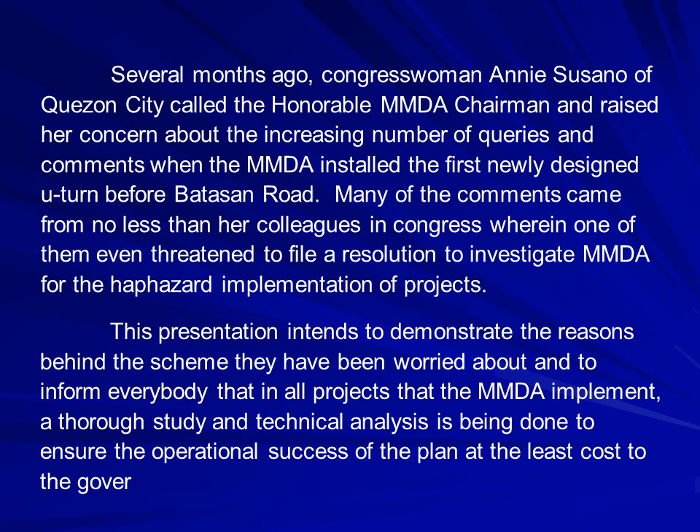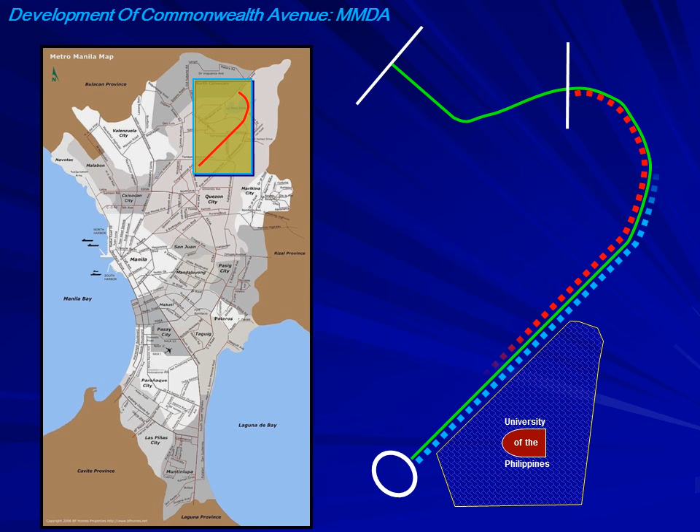Commonwealth Avenue, or Don Mariano Marcos Avenue, is the widest road in Metro Manila and the entire Philippines. Lying in the northeastern part of Metro Manila and Quezon City, it caters to 221,759 vehicles per day to and from the business centers of the city and the southern part of the metropolis.

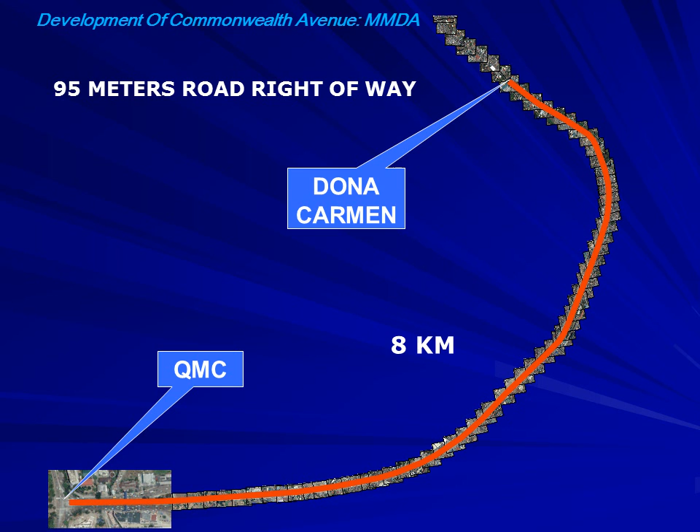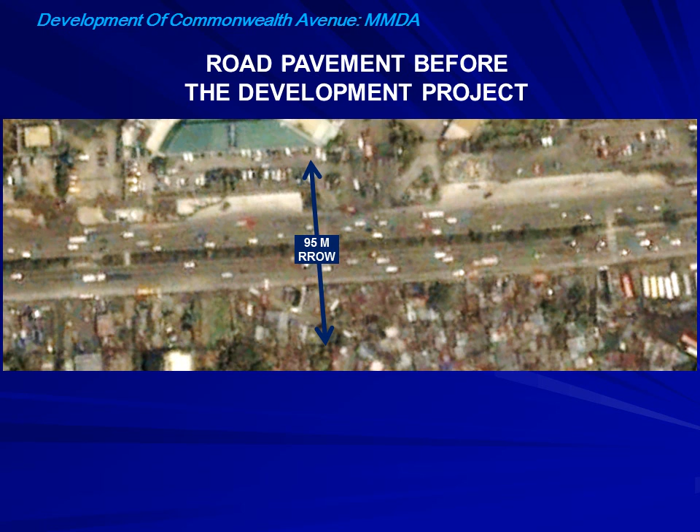It has a 95-meter road right-of-way, or RROW, from Quezon Memorial Circle up to Doña Carmen, a full 8-kilometer stretch representing 67% of its entire length of 12 kilometers ending at Mindanao Avenue. Before the start of the development project, the road has a variable width of 5 to 8 lanes, and most

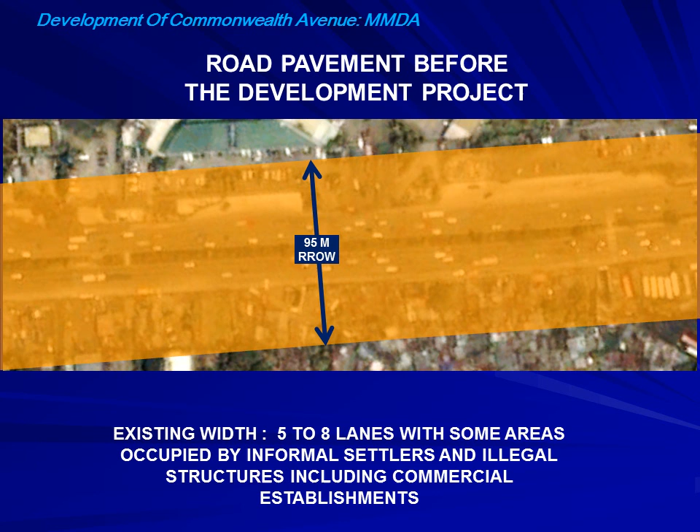of the areas beyond the pavement are occupied by informal settlers and commercial establishments. With that situation at hand, we in MMDA knew that it will take the long-known political will and determination of the Metro Chief and the cooperation of the local government of Quezon City, the understanding of all sectors and the entire community as well, to substantially clear the obstruction and give way to the continued progress of the development plan.

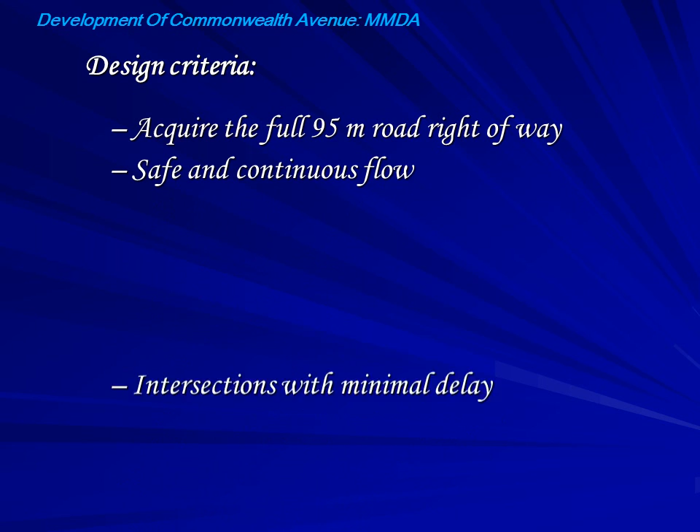To start the project design, we have set the following criteria. First is to acquire the full 95-meter road right-of-way. The road must have a safe and continuous flow, intersections with minimal delay, average speed of 50 km per hour, and design speed of 80 km per hour.

We also must have minimum obstruction and eliminate concrete barriers at U-turn slots. Finally, we should provide space for mass transportation system like LRTs, MRTs, tram, BRT, etc.

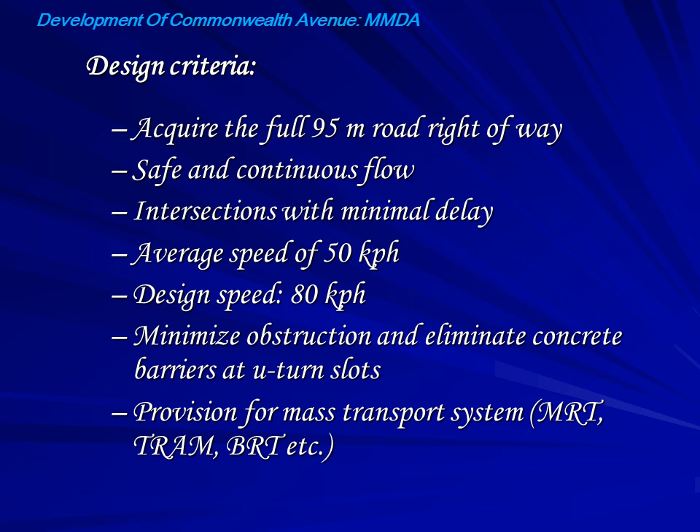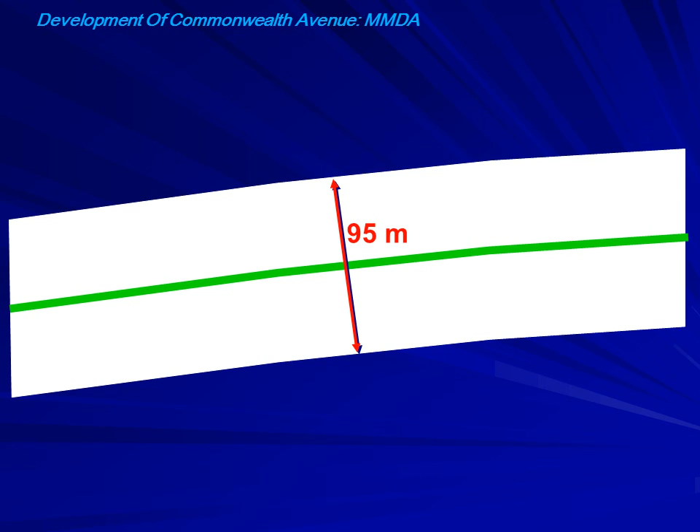Now, what are we going to do with the 95-meter road right-of-way? We can have a 10-lane road each direction with enough sidewalk, bike lane, and planting strip. But traffic engineering view stated that we should not.

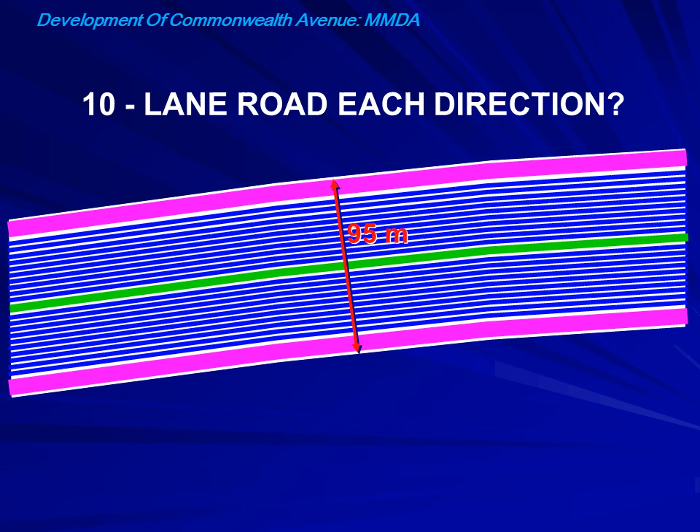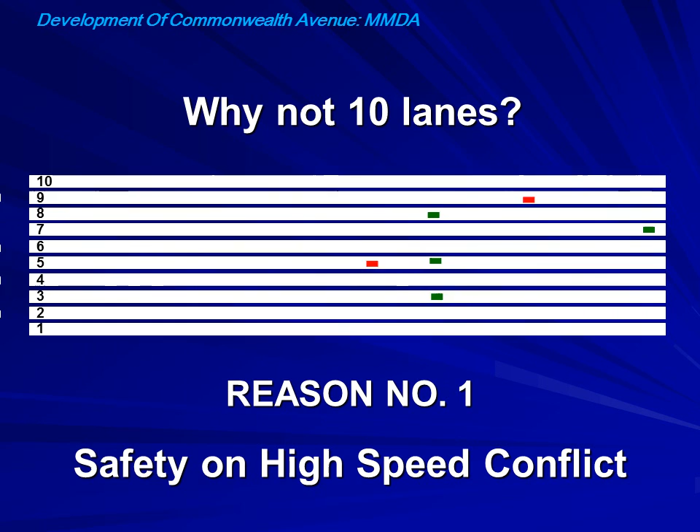Why? First reason is that there would be a safety hazard on high-speed conflict. When you are traveling on a highway at 50 to 80 kilometers per hour, you would be taking a dangerous movement from innermost to outermost lane when exiting to the abutting street or side street establishments. The same way in entering to the innermost lane. This is the same reason why no traffic engineer around the world assigns 10 lanes side by side on a high-speed highway.

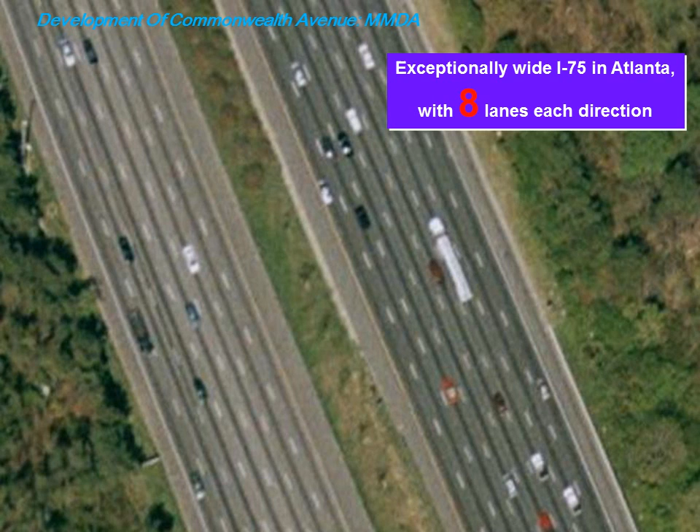Let us take a look at the widest roads in modern countries around the world. Exceptionally wide Interstate 75 in Atlanta, with 8 lanes each direction. Zagreb, Croatia is 70 meters wide, but only has 6 lanes, 3 lanes each direction.

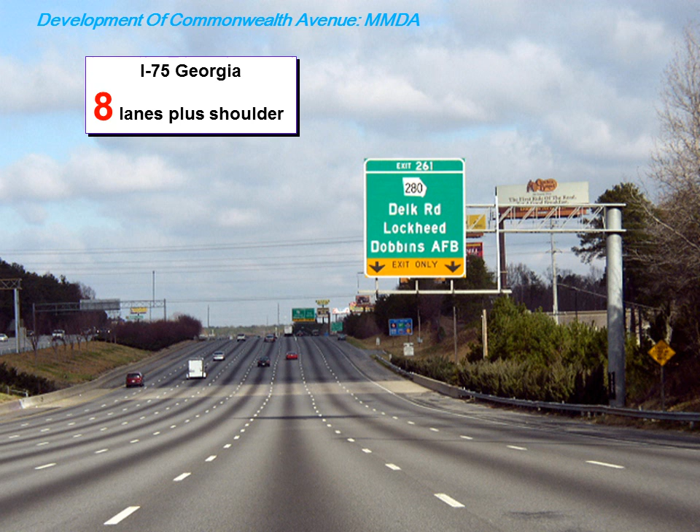I-75 Georgia, 8 lanes plus shoulder. Netherlands, A16, 5 lanes between dividers. A4, the western part of the ring road around Rotterdam, about 95-meter RROW, similar to our Commonwealth Avenue, but only has 2 to 3 lanes between dividers with shoulders.

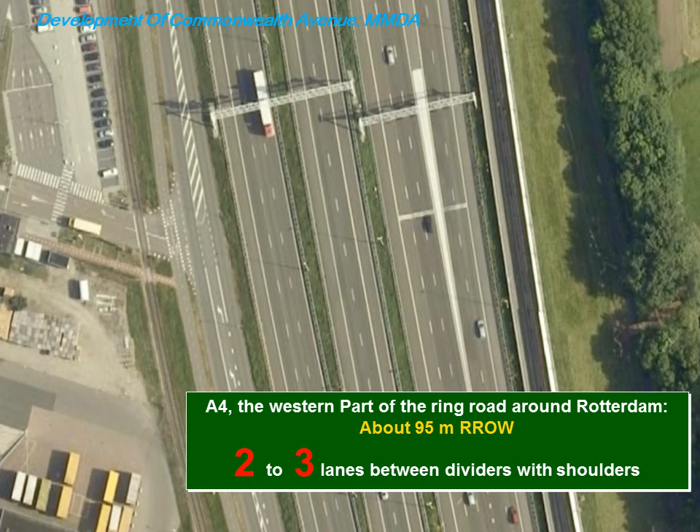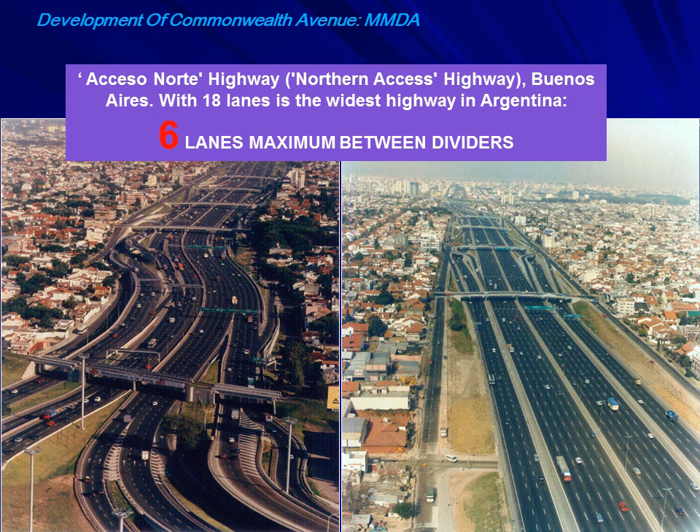Acceso Norte Highway, or Northern Access Highway in Buenos Aires with 18 lanes, is the widest highway in Argentina, 6 lanes maximum between dividers. Netherlands, A15 southern part, 6 lanes maximum between dividers.

Second reason why we should not assign a 10-lane carriageway is the vehicle conflict and traffic management problem on junctions. What we have at our hands is a 20-lane highway crossing against a 4-lane road. Commonwealth Avenue has 4 full intersections and at least 8 T-junctions.

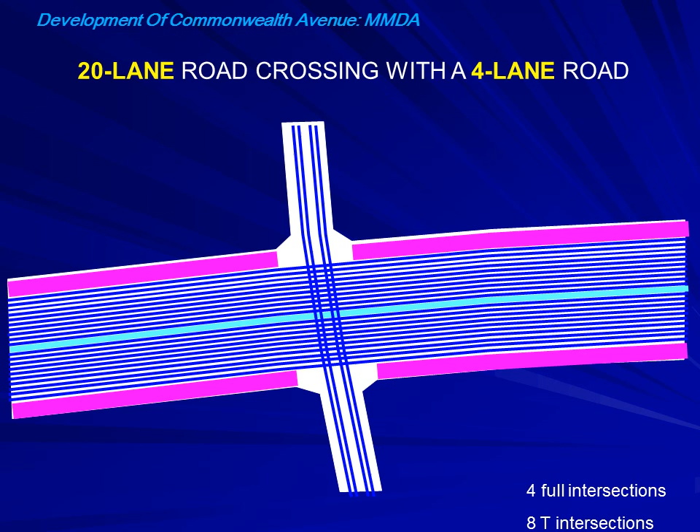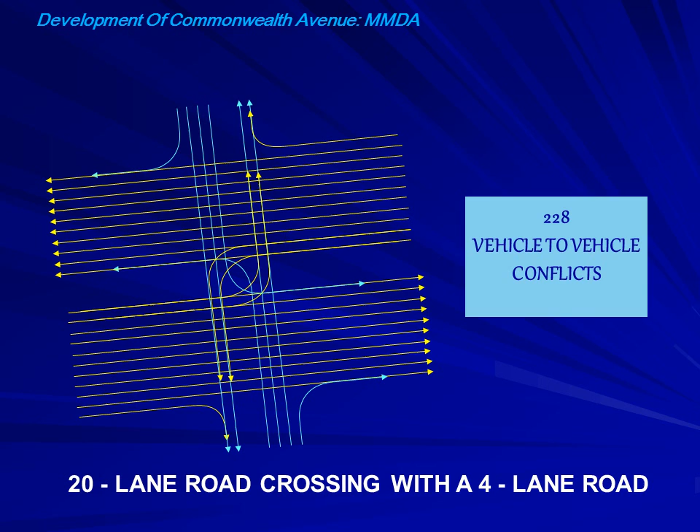This kind of junction will give 228 vehicle-to-vehicle conflicts, a situation that traffic engineers like very much. First, because it would give them a challenging job, and second, it would assure the need for their expertise and continuous job, of course. The foregoing considerations dictate that we have to reduce the number of lanes.

Commonwealth Avenue, with closely 222,000 vehicles per day, 13,000 of which pass the road during morning or afternoon peak hour, would need at least 5 lanes each direction. Considering the future increase in vehicular volume, 7 lanes per direction will be assigned.

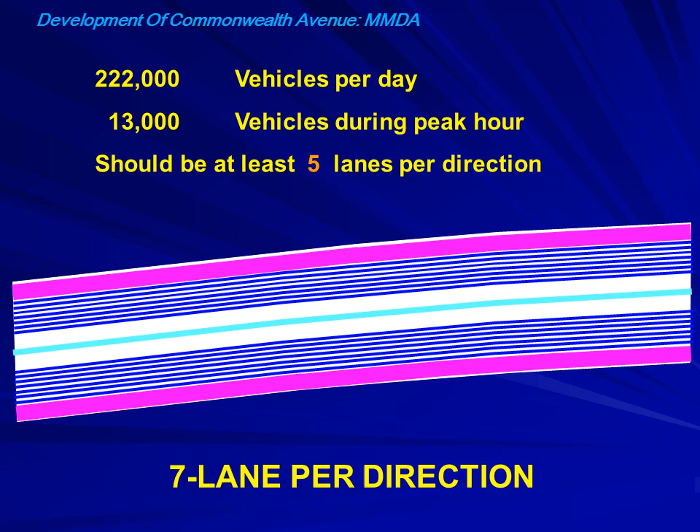What are the traffic engineering solutions to address the conflict? First, we can install traffic signal light facility at 5 million pesos plus 2.5 million maintenance expenses per year.

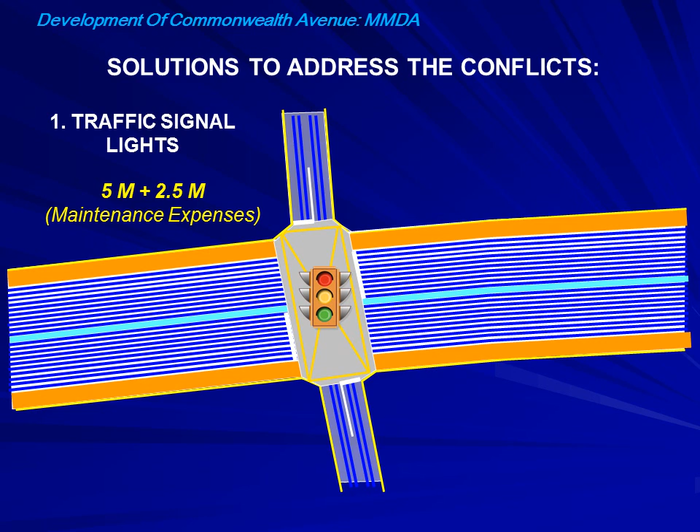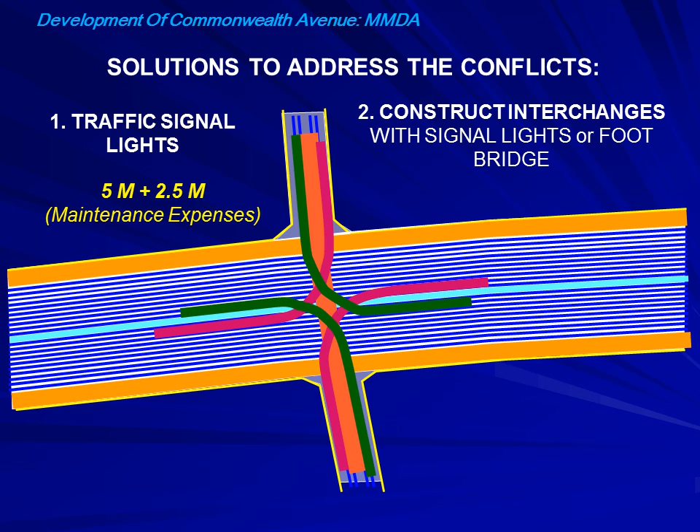Second, we can construct conventional interchange using 5 flyovers up to 4th level with footbridge or signal light for pedestrians. This would cost us about 1 billion up to 3 billion. Or we can construct elevated U-turn interchange for about 400 million.

Another simpler solution is the at-grade U-turn, which would need about 30 meter space at the center for the turning radius of long vehicles. This would cost only about 2 million per set and 24 million for the footbridge.

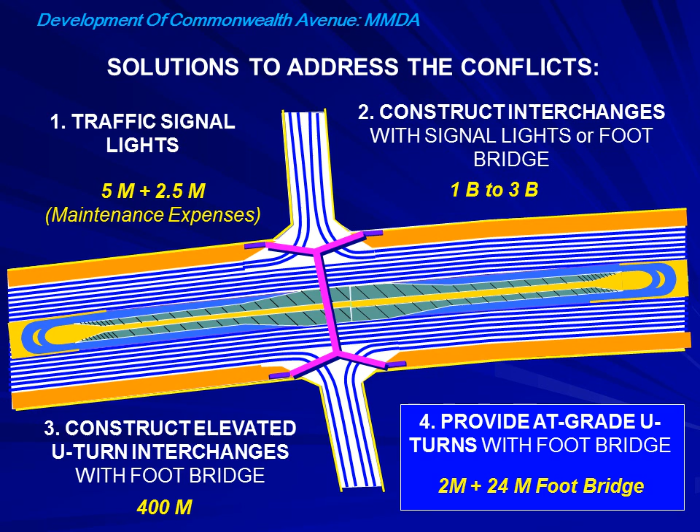Obviously, the most economical solution, besides being one of the schemes that satisfy the design criteria and the need for the reduction of the number of lanes on the carriageway for the safe and continuous flow of vehicles, will be the provision of at-grade U-turns.

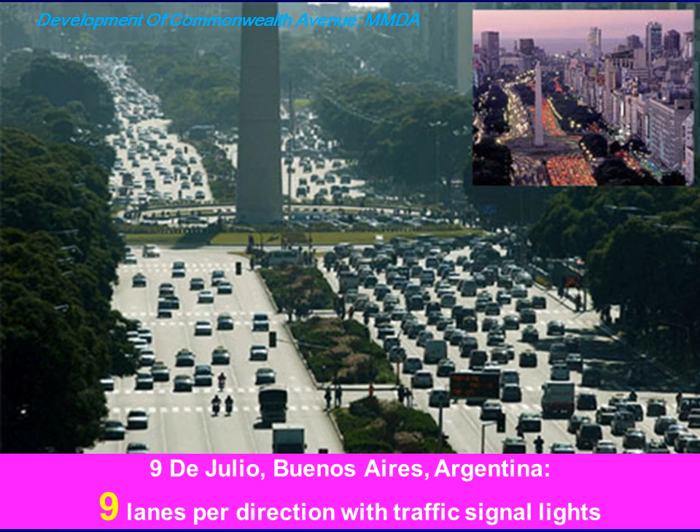Now let us look at some existing wide roads in other countries that utilize traffic signal light facility as the intersection traffic management. This is the 9 de Julio in Buenos Aires, Argentina during off-peak hours, 9 lanes per direction with traffic lights. And this is the same avenue during peak hours.

Note that in a road stretch with multiple signalized intersections one after the other, the delay per vehicle adds up in each intersection. The result? Accumulation of vehicles, especially when the volume is nearly equal to the road capacity.

Based on the foregoing presentation of criteria, restrictions, and considerations, we will now draw the comprehensive concept of the development. On the upper portion of the screen is the general cross-section, and the plan is in the lower portion.

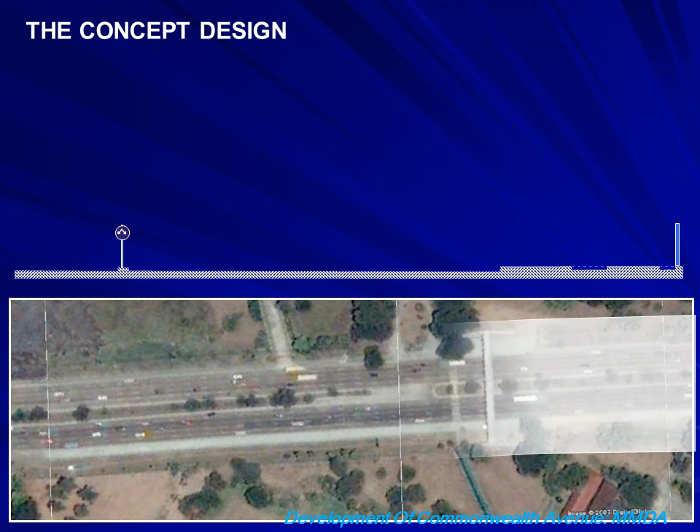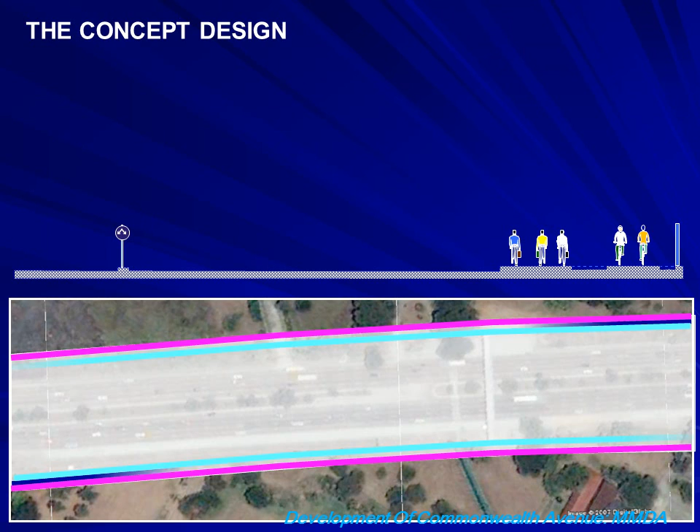From the 95-meter road right-of-way, we will have bike lanes in the outermost portion, a 3-meter walkway along the curb side, and a planting strip between them to provide shade and fresh air, and to serve as the dividing line that separates bikers from walking pedestrians.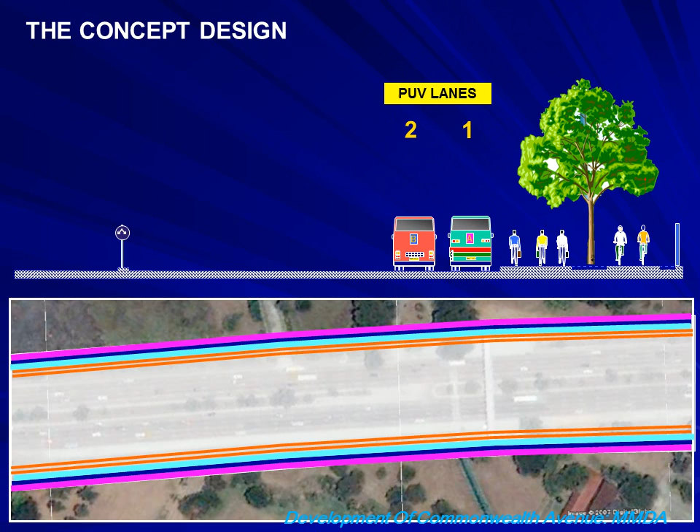The road pavement shall accommodate 2 lanes for public utility vehicles and 5 lanes for private vehicles. The U-turning vehicles in the emergency area will utilize a portion of the middle strip, separated from the 7-lane mainstream of through traffic. We will also provide footbridges about 500 meters apart along the stretch, and overhead signs on them or on separate gantry structures.

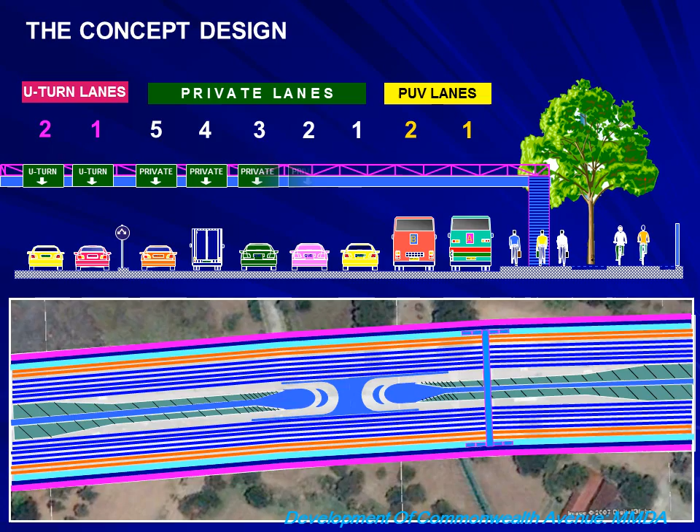Okay, let's have a checklist. What we already have are bikeway, walkway, planting strip, public utility and private vehicle lanes, U-turn lanes and emergency areas, footbridge, and overhead signage. Of course, we must have lighting, which we will install on high-mast poles.

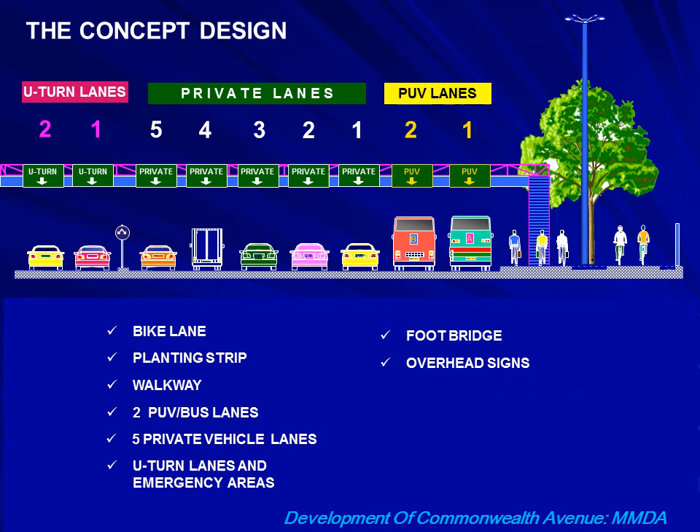The service poles should be on the outer limit of the road right-of-way to avoid obstructing the bikers.

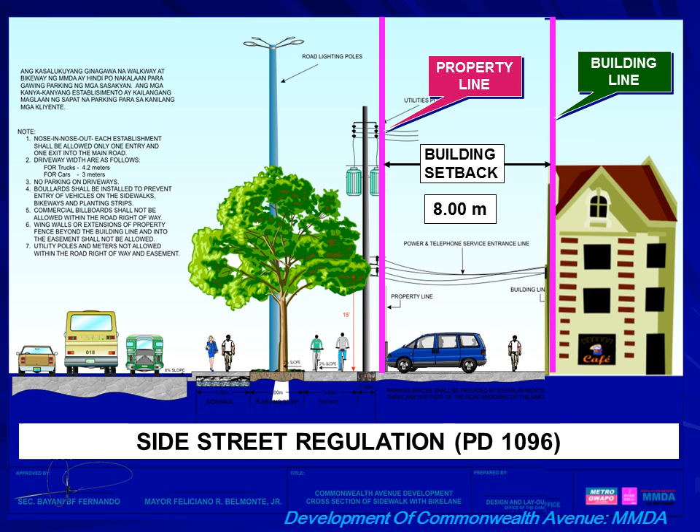On the side street regulation, the setback provision of PD 1096, the National Building Code of the Philippines, latest edition, shall prevail. This calls for an 8-meter setback from the road right-of-way limit or the private property line going into the property. This area, within the private property, will assure that the owners of the establishment have ample space for parking. In short, the law does not allow construction of any permanent structure within this area.

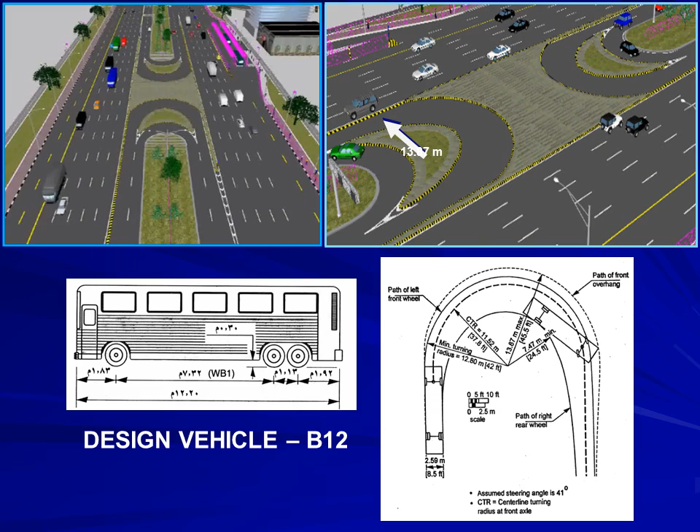If we intend to have a continuous flow of vehicles throughout the whole stretch of the road, the design of at-grade U-turns should stick to certain requirements. There should be enough turning radius to allow a safe, smooth, and continuous U-turn maneuver without the need for a concrete barrier, in such a way that through traffic would not be obstructed.

As you can see, the design of the U-turn will accommodate light vehicles only at the inner radius, and long vehicles at the outer radius. Small vehicles may also use the outer radius when no long vehicle is using it.

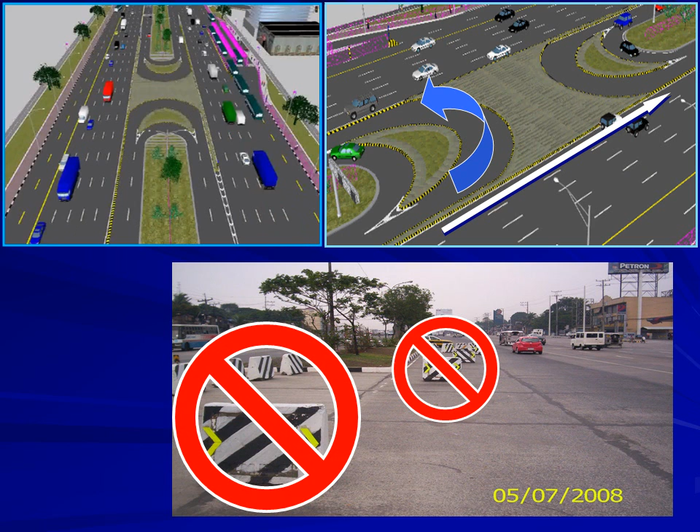After the final decision for the design concept, the next task of the traffic engineers is to prepare the detailed engineering design. First, we conducted a physical inventory of the existing road.

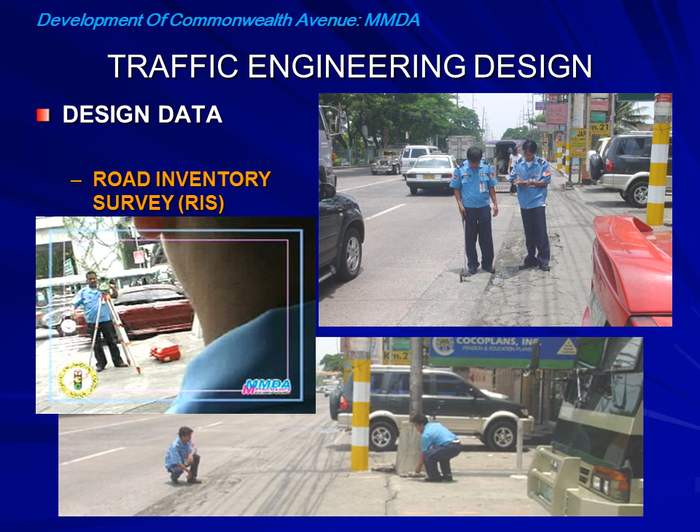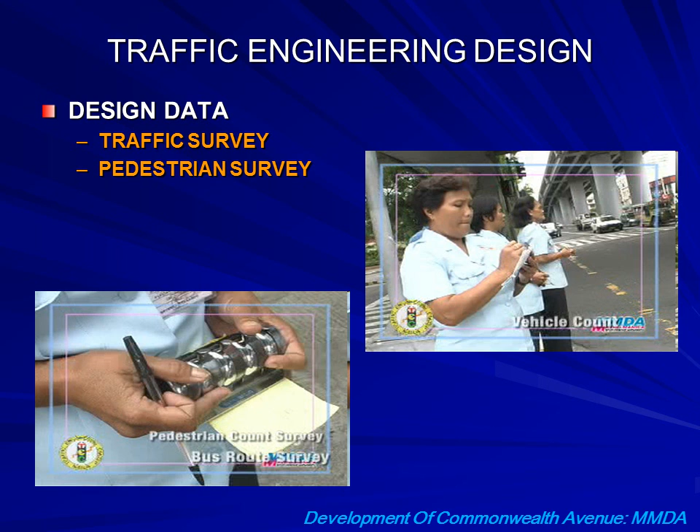We gathered traffic and pedestrian data, including the turning movement of vehicles within each of the existing intersections, pedestrian count at every possible location of a footbridge, and passenger data at loading and unloading areas.

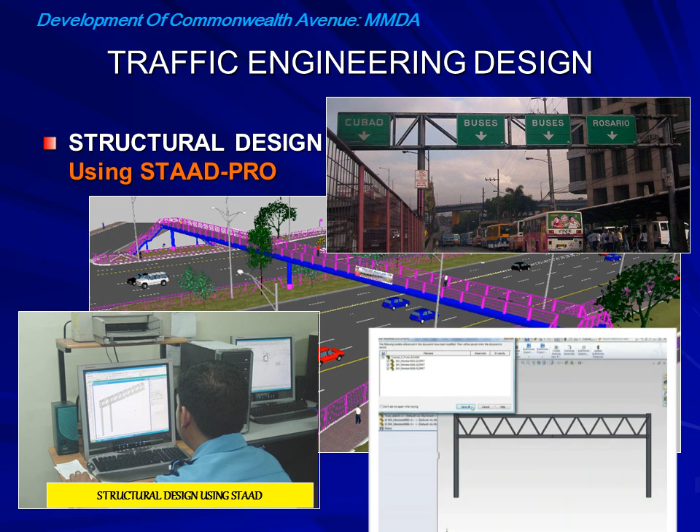Traffic engineering design includes preliminary structural design using STAAD Pro, a structural analysis and design software. Next is roadway design using Path Planner and CADD, or computer-aided design and drafting.

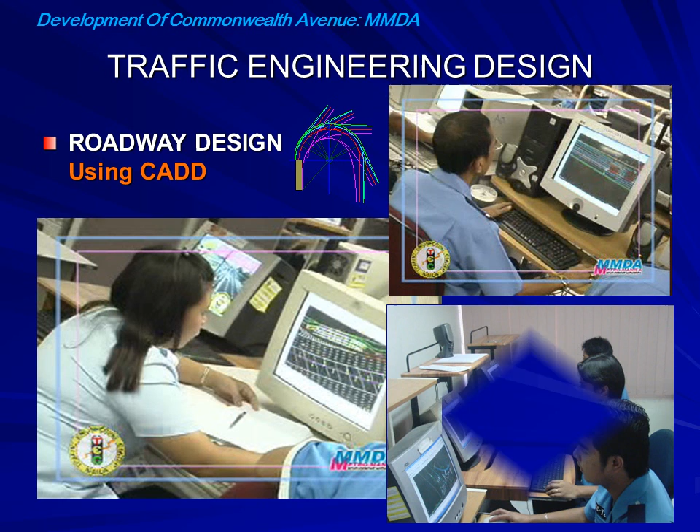The center's traffic engineers and computer operators include technical personnel dedicated to traffic analysis and computer simulation.

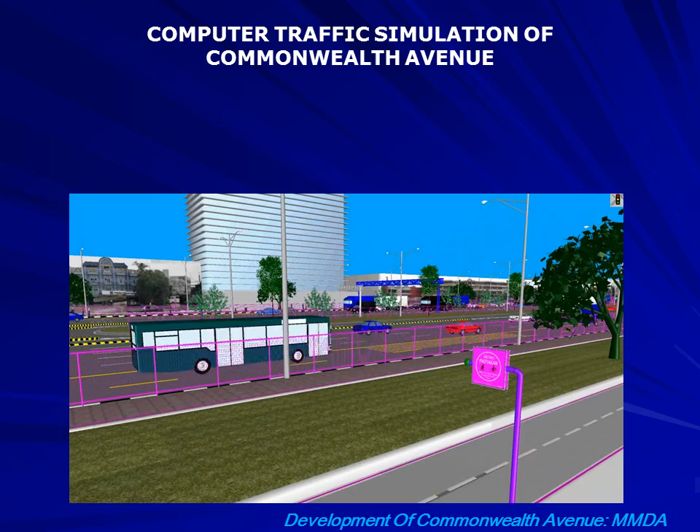The overall traffic design will be confirmed by the traffic simulation, showing all the design parameters and data inputted into the computer. The result is fine-tuned until the best combination of geometric design and proper flow distribution is achieved, taking into consideration the local situation and pedestrians' and drivers' behavior in the actual scenario.

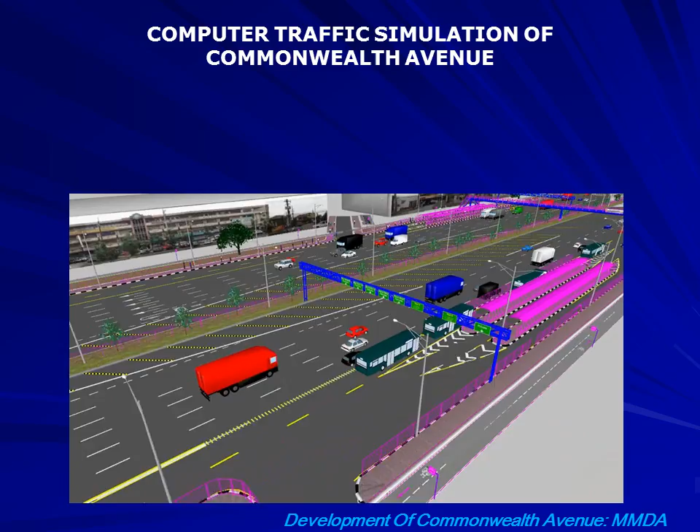After the foregoing activities have been perfected, road furniture and landscaping are included for the development of presentation materials, as shown here.

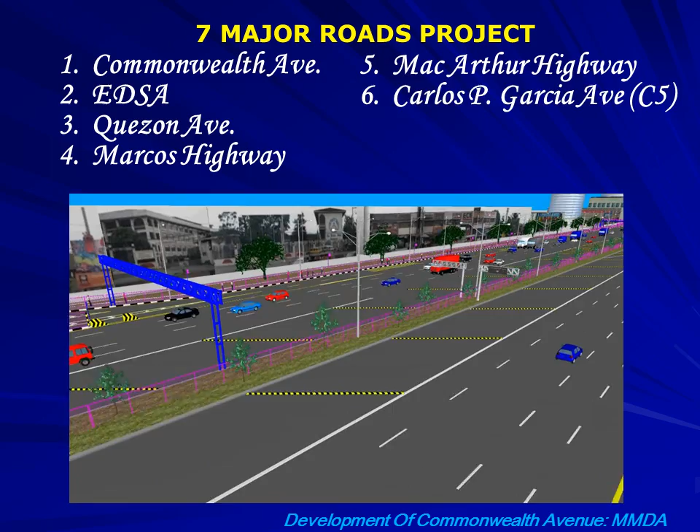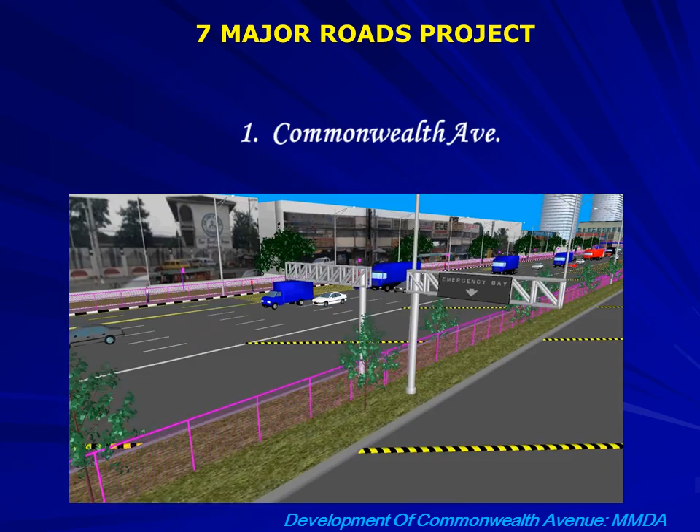The Commonwealth Avenue Development Project is one of 7 major road projects selected by the MMDA in order to prioritize the inflow of activities at the most congested but important arterial roads in Metro Manila. The scheme of clustering the projects into 7 ensures that each stretch of road will be substantially completed at the least expense, so as to create a positive impact on motorists.

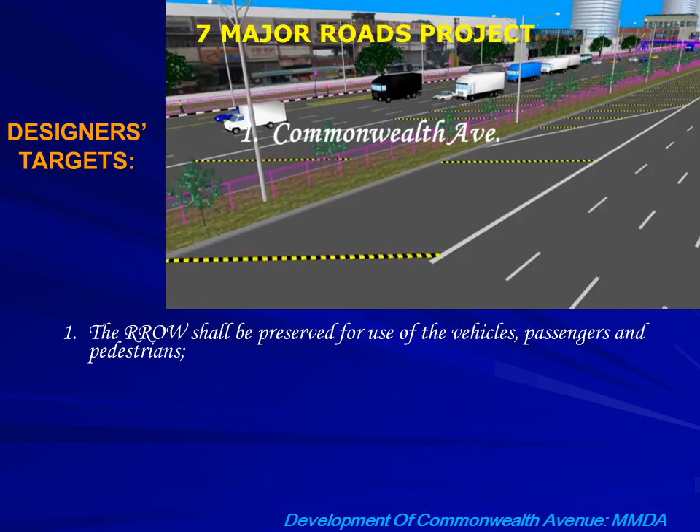When completed, the designers hope to achieve the following targets. First, the road right-of-way shall be preserved for use by vehicles, passengers, and pedestrians, and shall demonstrate that there is indeed a government determined and responsive to the needs of the transportation sector.

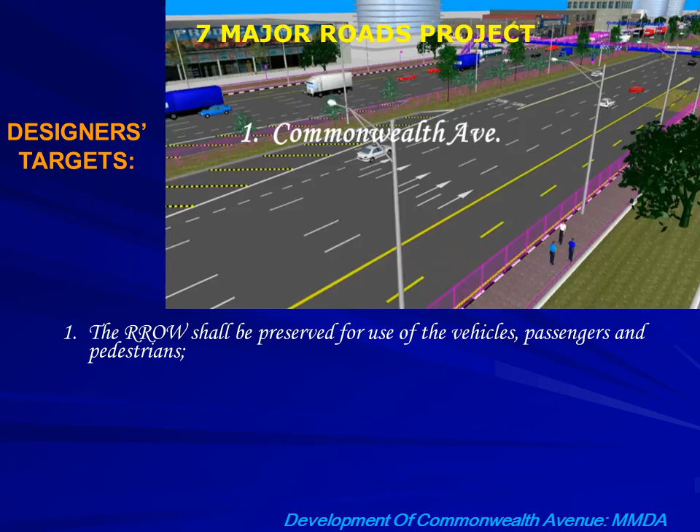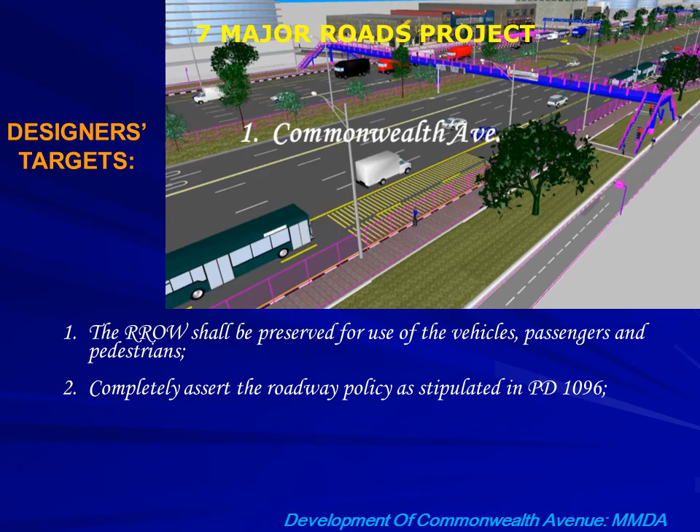Second, it shall completely assert the roadway policy from the main carriageway up to the equally important sidewalk, as stipulated in PD 1096. Third, it will save several billion pesos a year in the economy due to fuel and personal time savings brought about by the elimination of congestion, plus reduction of carbon emission and health benefits, to name a few.

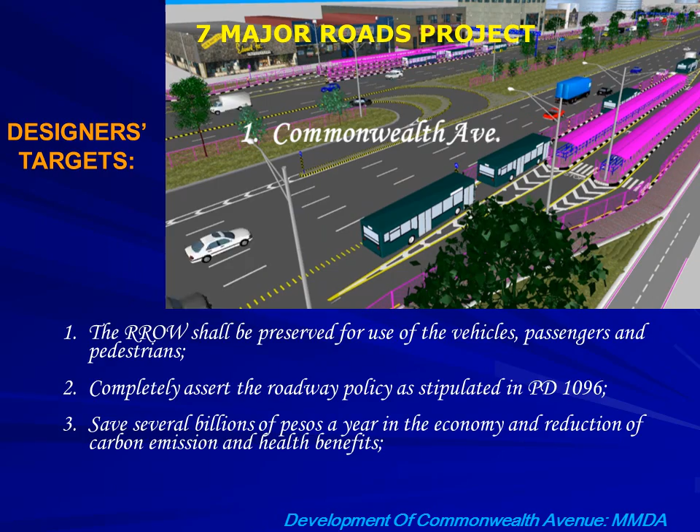And fourth, reduction of accidents due to safe design, appropriate geometry, and consistency of traffic movements.